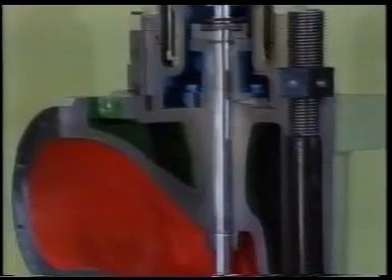This film, together with the blue maintenance manual, will help you handle maintenance on the exhaust valve. All necessary instructions for exhaust valve overhaul are to be found in the maintenance manual, group 275, pages 1 to 4. All spare parts needed can be found in the code book, pages U275.

The instructions given in the course of this film are in the maintenance manual. Please read them carefully. Use the tools recommended, especially when grinding the valve, seat and spindle. When assembling, make sure that everything is perfectly clean. Don't forget that the reliability and life expectancy of the exhaust valve is dependent on proper maintenance.

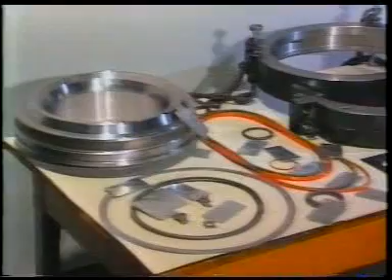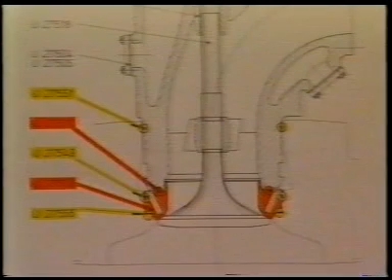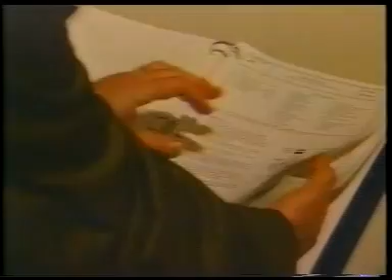At the beginning of the working sheets, there is always a list of tools with the corresponding code numbers. From these numbers you can find the appropriate tool at the end of the maintenance manual, group 940. The valve protection must always be used for storing and moving the exhaust valve.

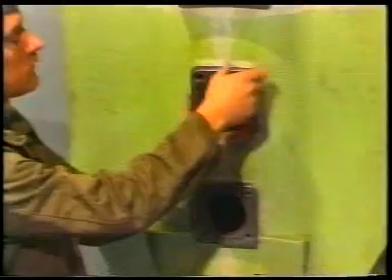For engine types RTA 76 and RTA 84, an additional support will be used on the swivel device. This swivel device makes valve overhauls much easier. It too is a standard tool provided with the engine.

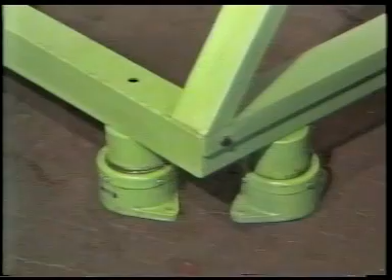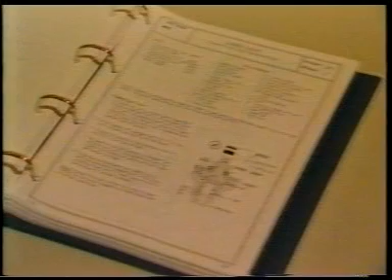The device should be placed so that as little vibration as possible is sustained, because the valve seat is ground on it. To ensure chatter-free grinding of the valve seat, the swivel device is equipped with vibration dampers. All parts of the exhaust valve are dismantled in the sequence described in the maintenance manual, group 275, page 2.

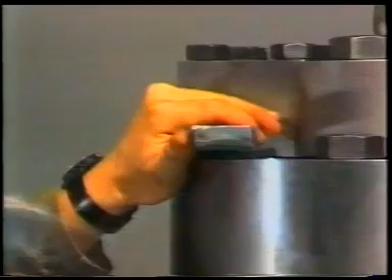The housing head is lifted off completely. The hydraulic piston is secured against falling out.

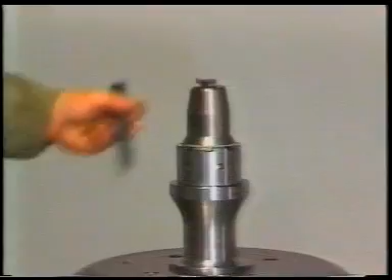The spindle nut is tightened hydraulically. Pay attention to the maintenance manual on Group 940, page OD, operating instructions on the hydraulic pre-tensioning jacks. Don't forget that when slackening with the hydraulic jack, it must be turned back by half a turn.

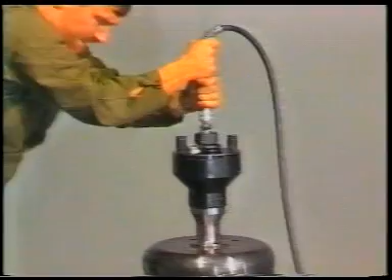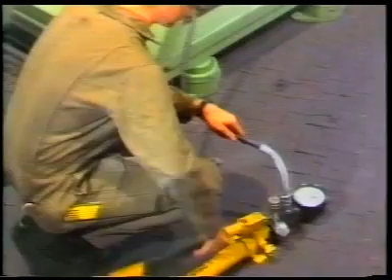These high-pressure connections must be clean and undamaged. Keep the vent screw open until oil emerges without bubbles. Pressure is raised to 600 to 620 bar until the nut can be slackened easily.

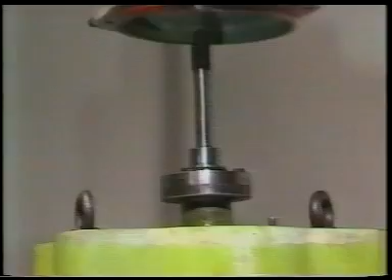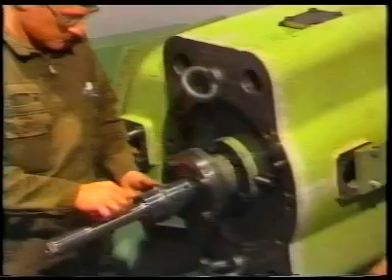After lifting off the air cylinder housing, the swivel device is turned 90 degrees. To ensure that the valve stem passes the frame of the swivel device, it is advisable to lift the valve by means of two pieces of wood about 40 millimeters thick. In this position, locking ring and Belleville washer are disassembled.

The spindle seal should be dismounted after the disassembly of the valve spindle. If the headroom is restricted, the valve spindle may be dismantled in this position too. The swivel device is turned 90 degrees so that the valve disc points up. In this position, the valve spindle can be disassembled easily.

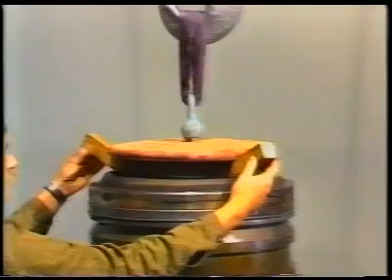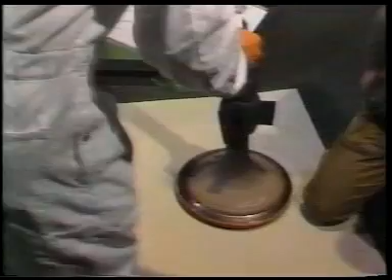In this position, the guide bush can be easily freed from possible residues such as lacquer, enabling effortless fitting of the pilot. If possible, the use of abrasive means should be avoided. After rough cleaning, the valve parts can be inspected.

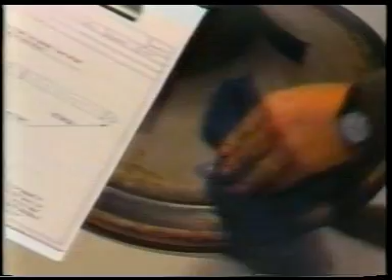As an aid in judging the valve condition, you will find two printed forms in Group 275, pages 3E and 3F. First, we examine the valve spindle. Here is the spindle identification, which must be entered in the record. Signs of wear, especially on the sealing surface, are to be recorded. For example, slight coloured deposits on the inside of the seating width.

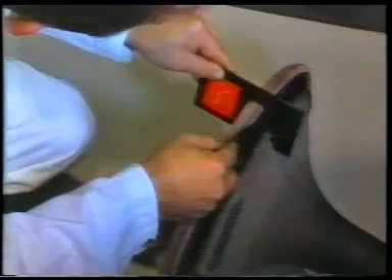The clearance between gauge and sealing surface is equivalent to the valve wear and must not exceed 3 millimeters. If the sealing surface is damaged, or there is more than 3 millimeters wear, the valve spindle must be either ground or replaced. Please be informed that damaged or worn down sealing surfaces can be reconditioned. Such work on Nimonic valves may only be carried out by specialized valve repairers authorized by Sulzer.

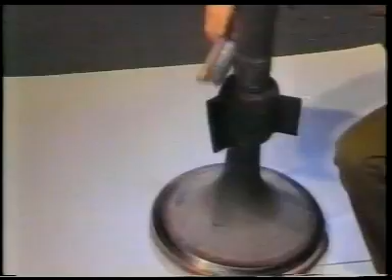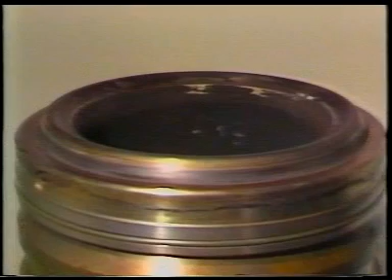Now the valve seat is assessed. Any damage on the seating surface is recorded under Findings. The clearance between gauge and sealing surface is equivalent to the seat wear and must not exceed 3 mm. If the seating surface is damaged or reveals more than 3 mm wear, the valve seat must be ground or replaced as the case may be.

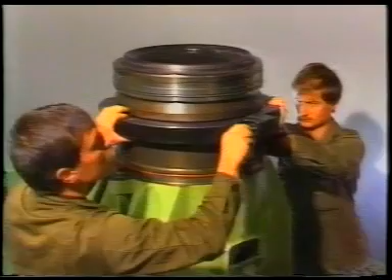We shall show you how the valve seat may be dismantled and replaced if necessary. You will find the description in the maintenance manual, Group 275, pages 3 and 3A.

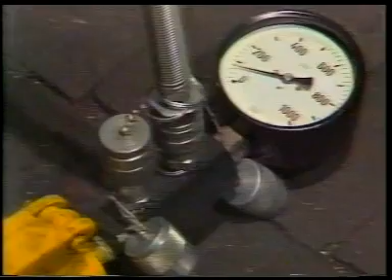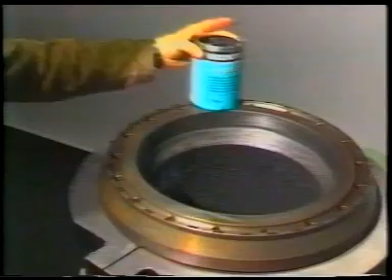This jack too must be vented until oil emerges without bubbles. It should take relatively little pressure to lift off the seat. This ring does not have to be removed. It is used again as a fitting tool. The bore and valve seat contact surface must be cleaned thoroughly and no damage may be revealed.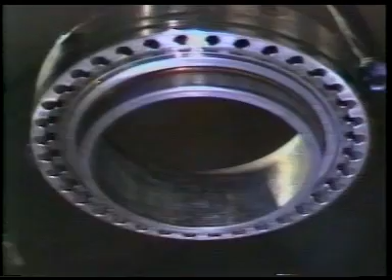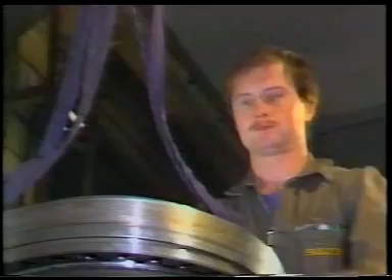A clean anti-seize compound must be used as lubricant. Always use a new original O-ring, coating it with the same lubricant. When pressing in a new valve seat, make sure that the O-ring does not drop out of its groove. The seat must be pressed in by hand as far as possible. Make sure that the valve seat is pressed in parallel and evenly.

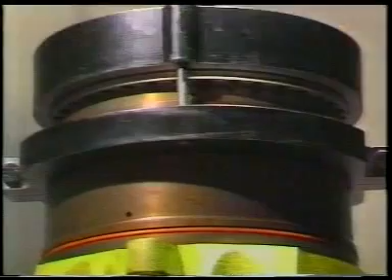When the seat makes contact, the screws are tightened uniformly. The contact is checked with a feeler gauge. The valve seat must touch without clearance. The pressing in device must not be removed. It is needed for the subsequent grinding operation in the tensioned state.

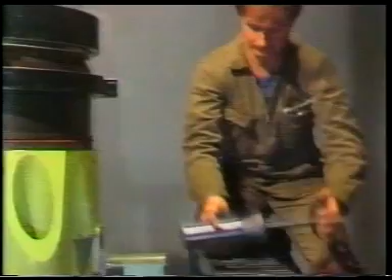The grinding pilot is centered on these two cones. Consequently, the ends of the valve guide bush must be clean and undamaged. This special tool will be provided with the engine. Look up the maintenance manual, Group 275, page 3B, figure C.

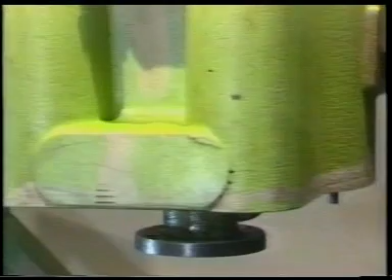Make sure that this nut is well tightened to ensure good centering. The spring-loaded bolts of this additional pilot support must be fixed carefully without applying any radial or tangential forces to ensure proper centering and stability.

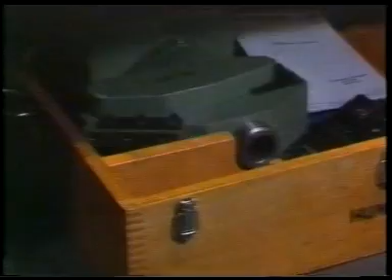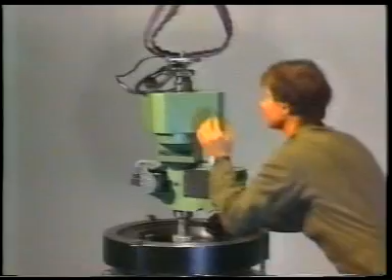Valve seats may be ground only with a suitable machine like this Hunger type. A grinding machine of this kind is included in the standard tools supplied with the engine. Grinding in the valve seat and spindle together is absolutely forbidden. A valve seat must always be finish ground in the fitted state. The grinding operation is the same, whether a new seat or a used one is involved. Even when fitting a spare valve spindle together with a used seat, the seat should always be equalized.

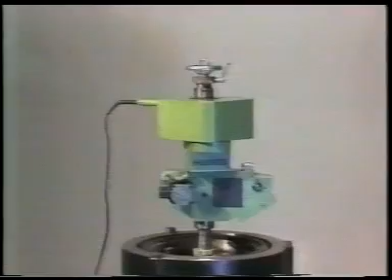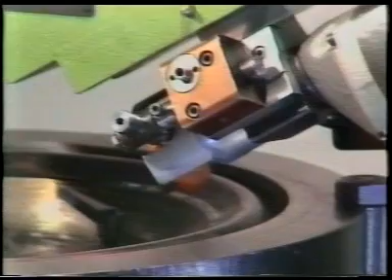Turn the hand wheel clockwise for rough height adjustment as far as possible. Assemble the parts of the grinding machine according to the maker's instructions. To ensure that the interchangeability of the valve spindle is retained, the valve seat grinding machine must not have any angle adjustment. The finish ground seat must have an angular accuracy of 30 degrees, 0 plus 2 minutes.

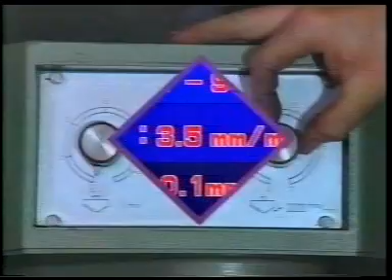Before grinding is commenced, the highest point must be found on the seating surface to be ground. This serves as a reference point for the infeed. A dial gauge may be used for this. First, the seat is rough ground. We have obtained good results with the Hunger grinding machine shown here using the following adjustments: rotation speed of grinder 7 to 9 RPM, feed 3.5 millimeters per minute, infeed 0.1 millimeters. Always grind in the same direction.

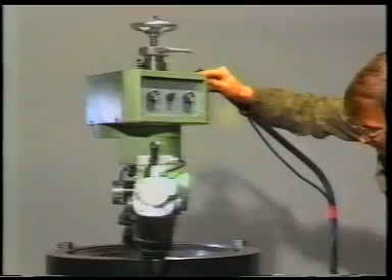We recommend grinding from the inside out. Grinding is continued until the stone produces uniform sparking over the entire circumference of the seat. If the grinding disc no longer grinds properly, it may be dressed for a next grinding sequence. Rough grinding is finished when the seat presents a uniform grinding pattern. Always dress the grinding disc anew prior to finish grinding.

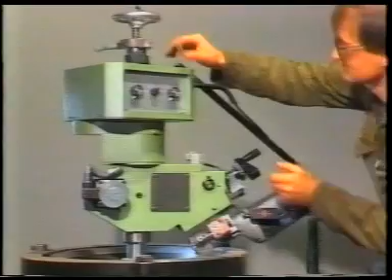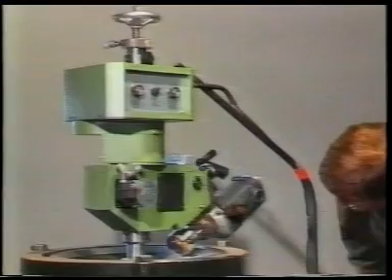After dressing the grinding disc, the new reference height must be found as starting point for the finish grinding infeed. For fine grinding, finishing, we have obtained good results with the following adjustments on this Hunger grinding machine: rotation speed of grinder 3 to 5 RPM, feed 1 millimeter per minute, infeed 0.03 millimeters. The infeed must be at least 0.025 millimeters, otherwise chatter marks may appear. When the seat displays a uniformly fine and chatter-free grinding finish, the grinding operation is concluded.

Make sure that no grindings or other residues are left in the valve cage. Special attention must be given to the valve spindle guide. According to the situation, a new, used or reconditioned valve spindle is fitted. A little bluing ink is applied to the spindle to check its contact. Owing to the risk of seizure, the spindle must only be lowered to the seat to obtain a bluing print.

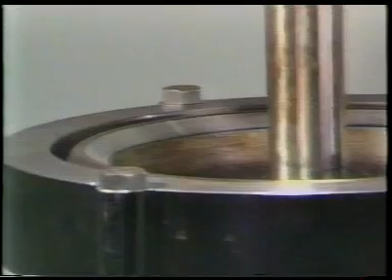The correct angle difference between valve seat and valve disc is checked by the opening S. In your maintenance manual group 275, page 3D, you will find a table showing the appropriate S dimension for your engine type. The bluing check must show the valve making contact at its entire circumference, but only on the inside. After the wear of the valve seat has been measured with the gauge and been noted on the respective form, the exhaust valve is now reassembled in the reverse order. Only lubricating oil is used as lubricant.

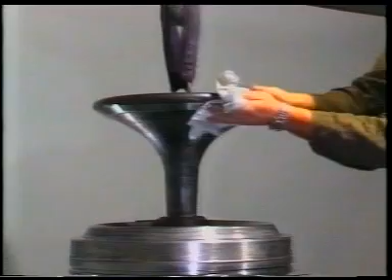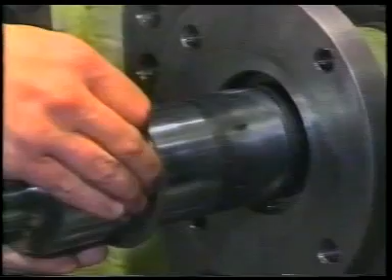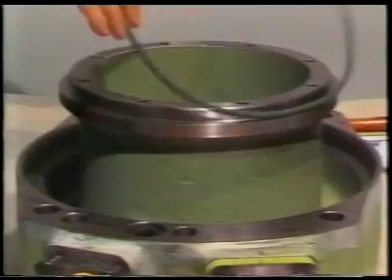Here we are fitting a new rod joint ring. This is how the valve spindle is pushed into the stop. Take care that no wooden residues remain between valve and spindle seat. On the air cylinder housing, we are also fitting a new piston joint ring. If you cannot fit the seal ring because it is too hard, it may be softened in hot water, around 95 degrees centigrade, for about 20 minutes. Use only locking plates in perfect condition.

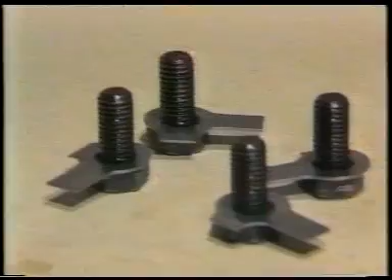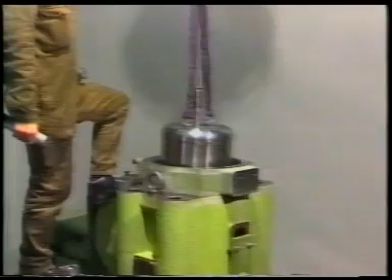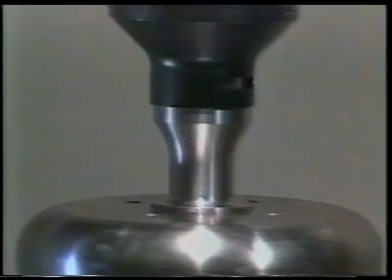O-rings should always be replaced. Make sure that the air cylinder is driven down evenly. Please follow the instructions for using hydraulic pre-tensioning devices in the maintenance manual, group 940, page 0D. After venting the jack, the pressure can be raised to 600 bar and the nut tightened by means of a tommy bar. Check with the feeler gauge that the nut is making proper contact before lowering the pressure. All tightening values are to be obtained from the maintenance manual, group 013, pages 1 and 2.

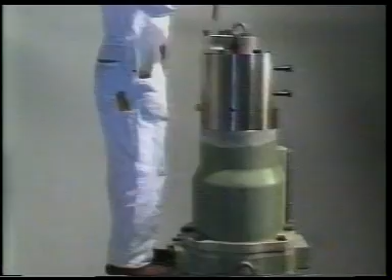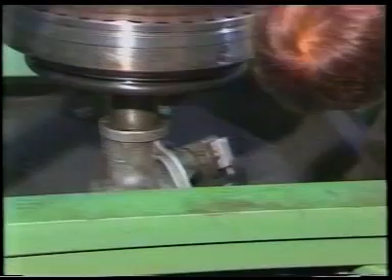Inspect the small bores on the vent housing for possible erosion damage. If necessary, this housing may be turned 180 degrees. The last check determines the penetration depth of the valve damper. It must be performed with the valve closed. Ascertain that the piston makes contact here.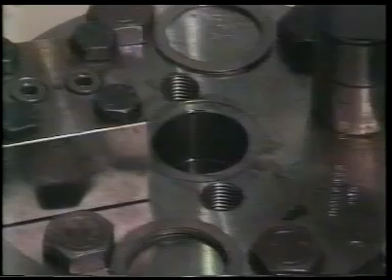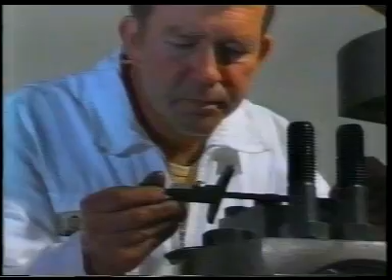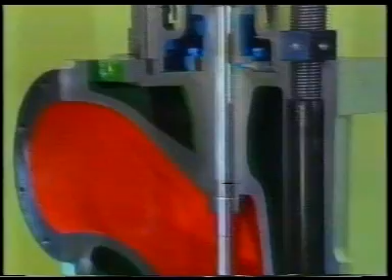The position of the hydraulic piston has been altered by grinding. Consequently, the new shimming thickness must be determined. In the maintenance manual, group 275, page 2C, you will find the procedure to determine the shimming thickness for your engine. The dimension H is determined with the depth gauge, then the shimming thickness is calculated. Make sure that the shimmings are undamaged, since they provide upper sealing at the same time. The exhaust valve is now completely overhauled and ready for fitting. Don't forget to use a new soft iron seal when fitting the valve in the cylinder cover.